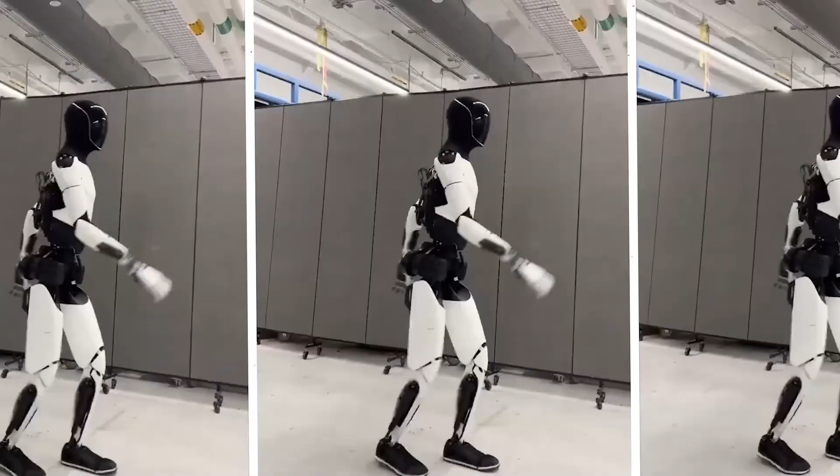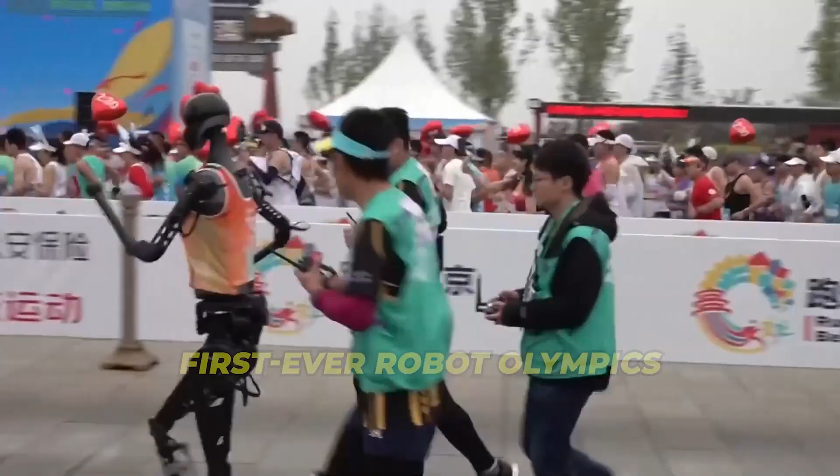But Unitree isn't alone in this race. Lenovo is stepping into the humanoid arena with surprising ambition, and China is preparing to host the first ever Robot Olympics. This isn't just progress, it's a turning point in the evolution of robotics, and it's unfolding right now.

The game-changing brain, AMO. So what we're saying was that Unitree's G1 humanoid robot just received a revolutionary upgrade called AMO, or Adaptive Motion Optimization. This isn't just a software update, it's essentially giving the robot a brain that understands how to move like a living being. What makes AMO special?

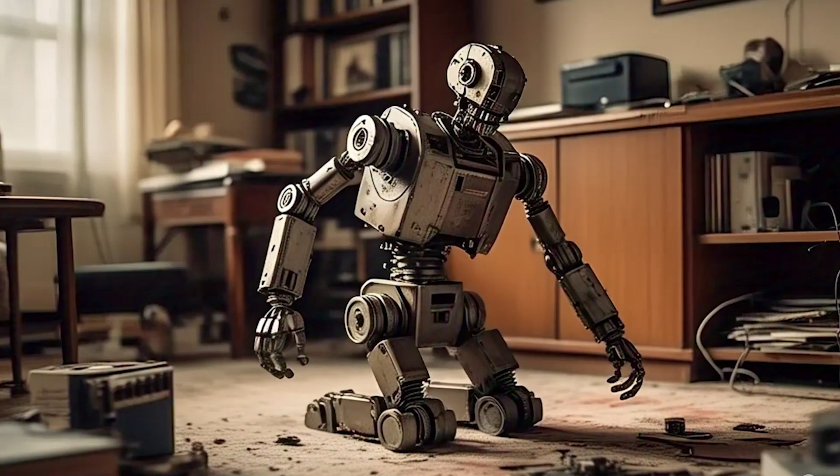Most humanoid robots struggle with complex movements because controlling 29 degrees of freedom while maintaining balance is incredibly difficult. Traditional approaches used rigid control systems or pre-programmed motions that couldn't adapt to real-world environments. AMO changes everything by combining reinforcement learning with trajectory optimization.

The system runs millions of simulations, allowing the robot to fail repeatedly without physical damage. It learns to pick up objects from the floor, reach high shelves, twist its torso, and crouch, all without losing balance. These lessons then translate into real-world behavior that works not just in controlled environments, but in your actual home.

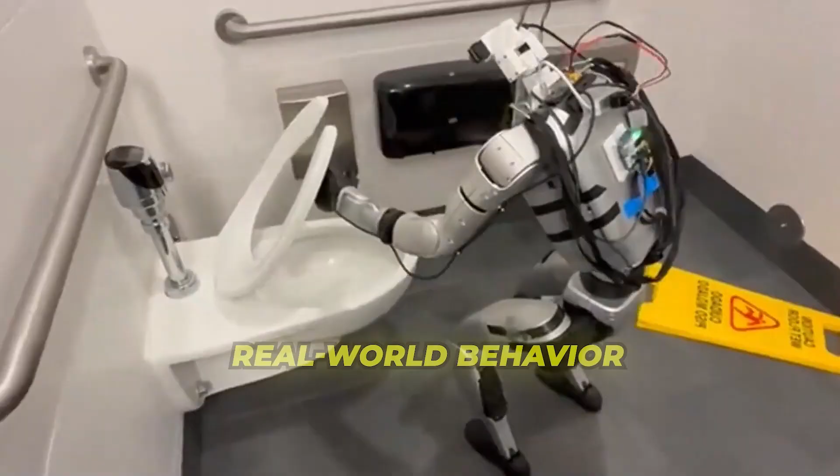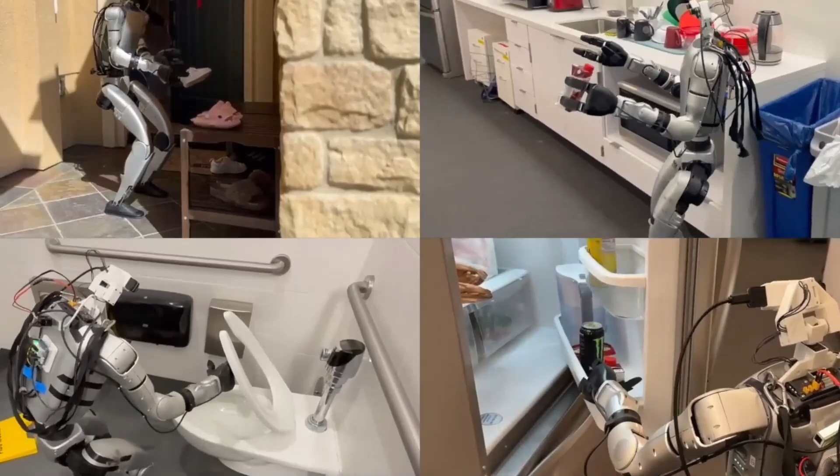When you see the G1 bend down to grab a toy, or carefully adjust its balance to place a bottle on a high shelf, that's AMO in action. It's controlling the robot's entire body, legs, torso, waist, based on an internal plan, not just isolated joint movements. And it does this in real time, responding to environmental changes and adapting to unpredictable inputs.

What's truly remarkable is the teleoperation capability. You can control G1 using a VR headset and it'll mirror your movements. But here's the magic: when you let go, it doesn't freeze. It understands the goal and continues executing the task, smoothly transitioning from human guidance to autonomous action.

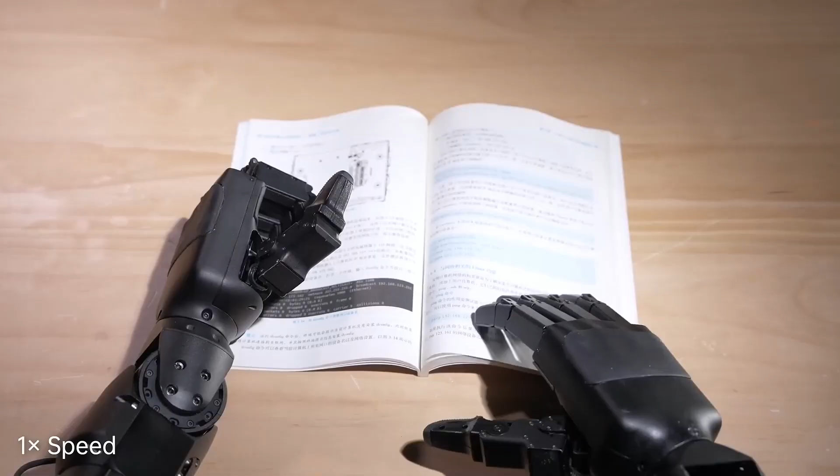Under the hood, AMO uses a hybrid motion synthesis pipeline that blends human-like arm movements from motion capture data with sampled torso commands. This generates entirely new kinds of whole-body actions that weren't even in the original datasets. The robot isn't just imitating, it's generalizing.

For example, G1 doesn't rely solely on waist motors to tilt its upper body. Instead, it shifts its legs, bends its knees, and uses full-body posture to reach angles that previous robots couldn't attempt. There's extensive work behind the scenes to ensure this control works out of distribution, meaning G1 can handle commands and situations it never encountered during training.

In testing, G1 performed tasks like picking up baskets from floor level, walking forward, and placing them on eye-level shelves. This kind of full-body coordination, from crouching to twisting to reaching to placing, used to be science fiction. AMO makes it routine. Now, if you are shocked with this news, make sure to watch how China has already...

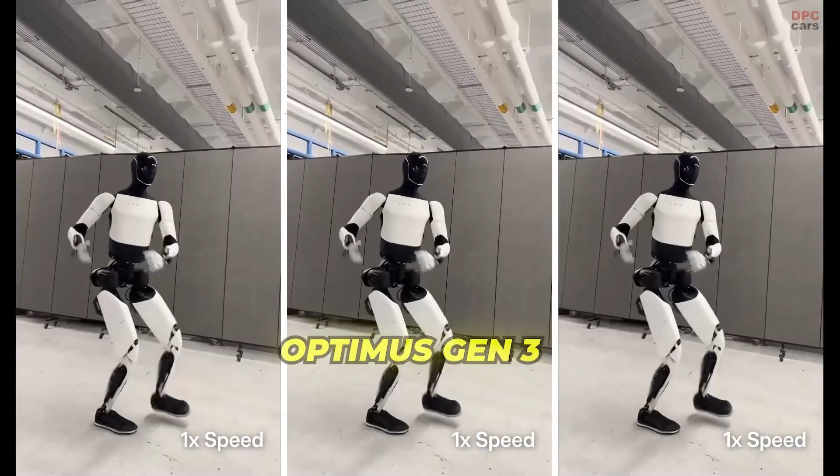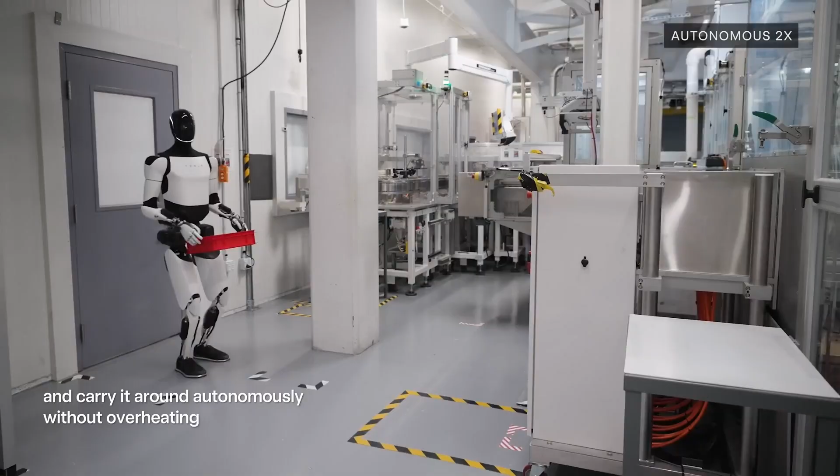But here's the twist: this isn't a minor evolution. This is the world's first truly autonomous humanoid robot. To understand just how revolutionary Tesla Bot Gen 3 truly is, we need to look at what separates it from both its predecessors and every other humanoid robot currently in development.

When the first Optimus prototype debuted in 2022, critics were quick to dismiss it as nothing more than an expensive tech demo. The robot could barely walk in a straight line, and its movements were rigid and pre-programmed. Fast forward to 2025, and we're looking at a completely different machine.

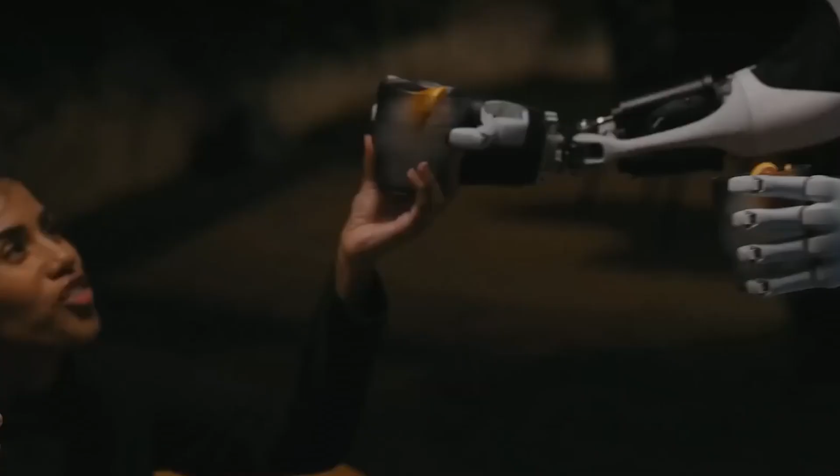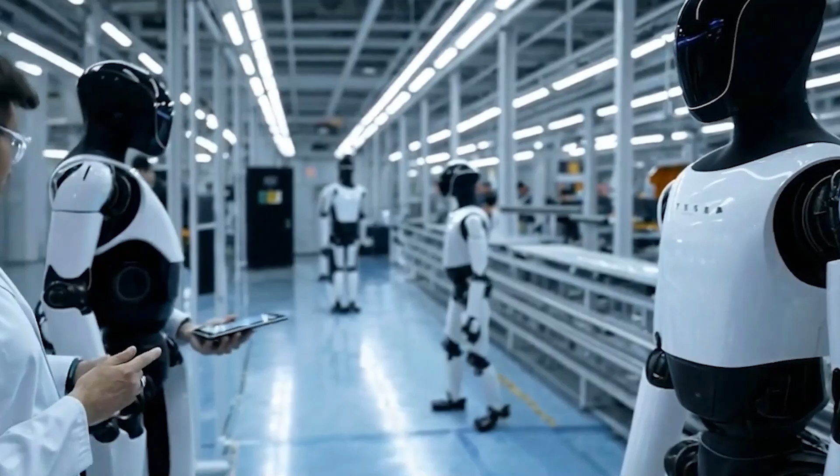The most striking difference lies in Optimus Gen 3's dynamic real-time control system. While previous versions relied heavily on pre-programmed movements and basic servo motors, Gen 3 operates through what Tesla engineers call simulation-first learning. Every movement is refined within Tesla's Dojo supercomputing environment, where reinforcement learning teaches the robot how to shift its center of gravity and adjust joint torque using feedback loops accurate to the microsecond.

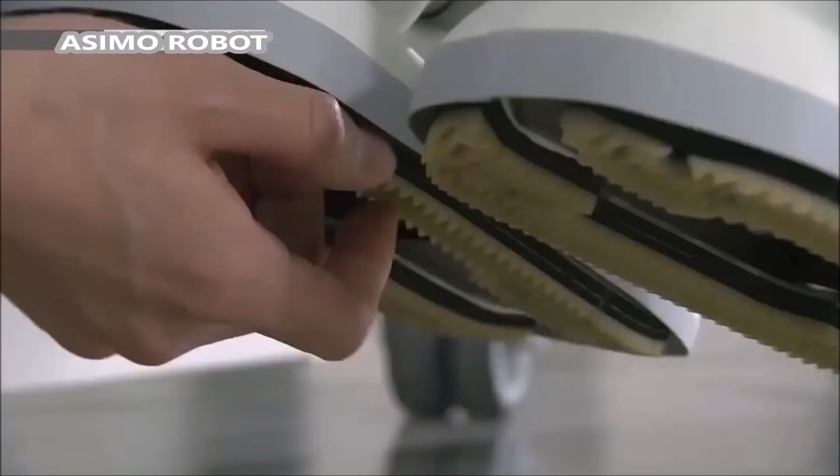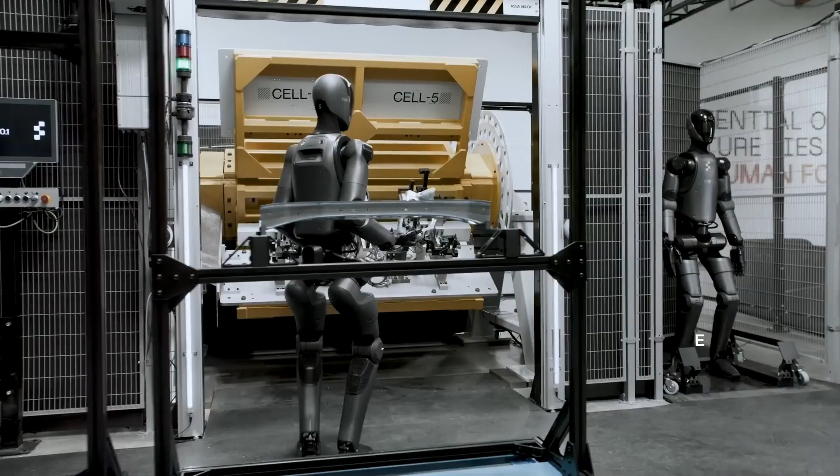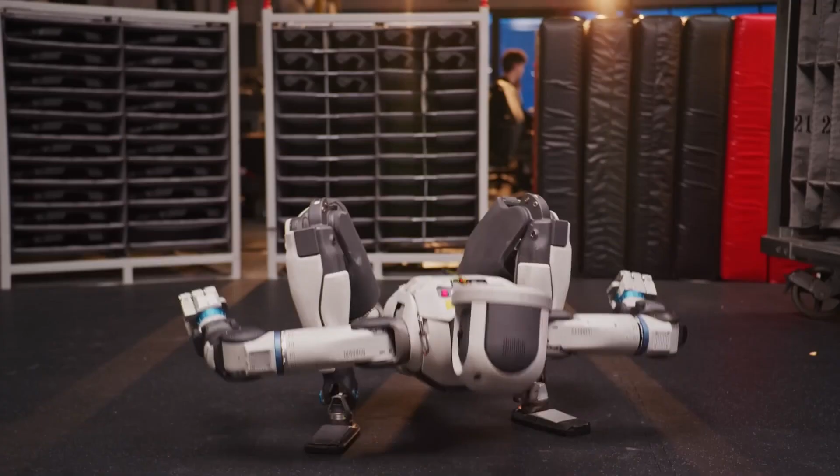Just this week, Boston Dynamics revealed that their latest Atlas humanoid has been equipped with a perception system so advanced that it can work through complete chaos, fix problems on the fly, and even learn from mistakes without any human intervention. We're not talking about pre-programmed movements or carefully choreographed demonstrations anymore. This is a machine that can literally think its way through unexpected situations, and the implications are absolutely mind-blowing.

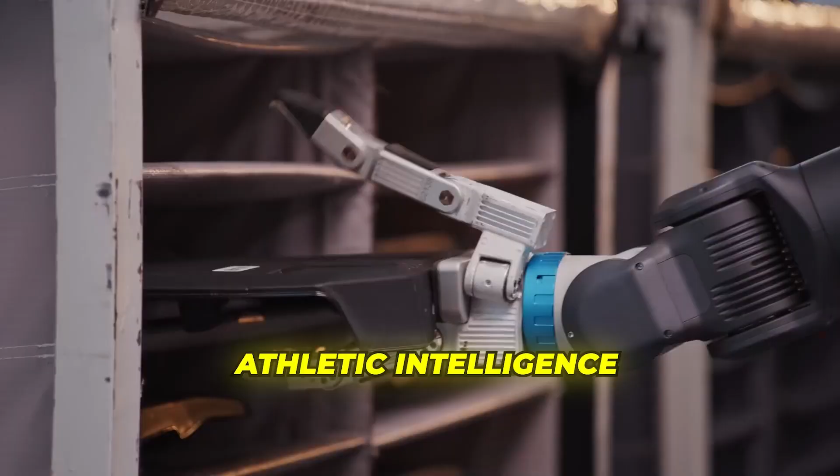But here's what makes this even more incredible. While competitors like Tesla's Optimus are still struggling with basic walking patterns and China's most advanced robots require constant human oversight, Atlas has achieved something that seemed impossible just months ago. It's operating with what engineers are calling athletic intelligence, the ability to perceive, think and act with the fluid adaptability we've only seen in biological systems.

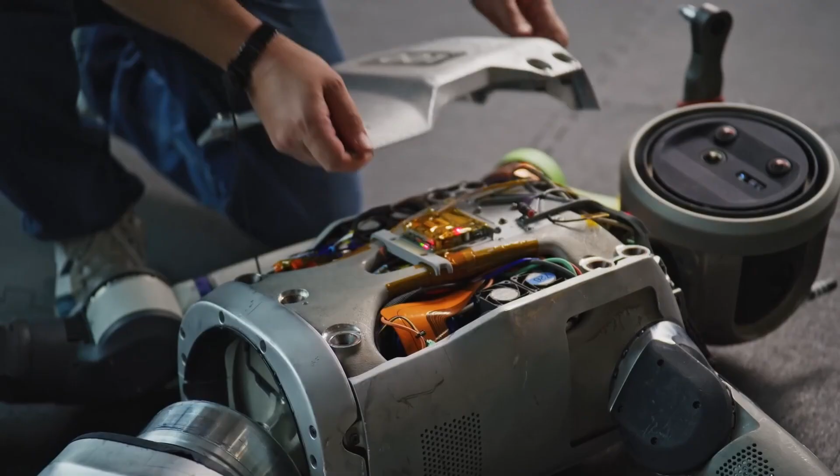So in this video, I'm going to break down exactly what makes this new Atlas so revolutionary, show you the 5 breakthrough technologies that are powering its artificial brain, and explain why this represents the biggest leap in robotics since the invention of the computer. Trust me, by the end of this video, you'll understand why we're witnessing the birth of truly intelligent machines, and why the future just arrived faster than anyone expected.

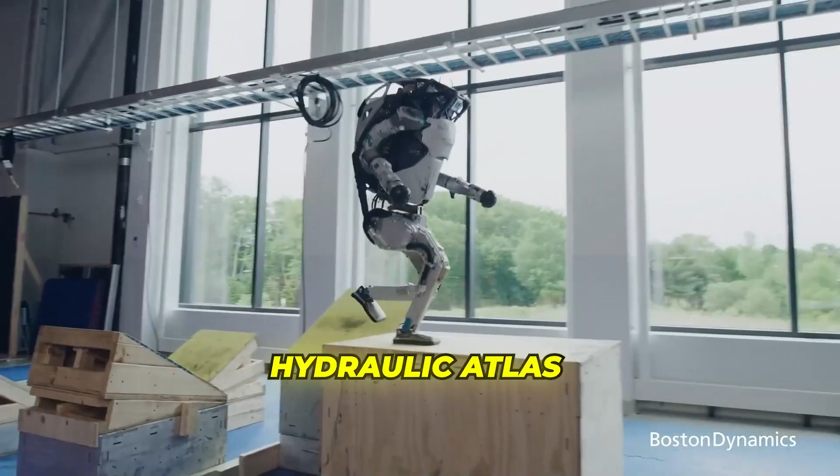To understand just how revolutionary this new Atlas really is, we need to look at the incredible journey that brought us here. The original hydraulic Atlas that captured the world's attention was essentially a mechanical marvel, incredibly strong, surprisingly agile, but ultimately limited by its reliance on pre-programmed movements and hydraulic systems that were loud, messy and energy-hungry.

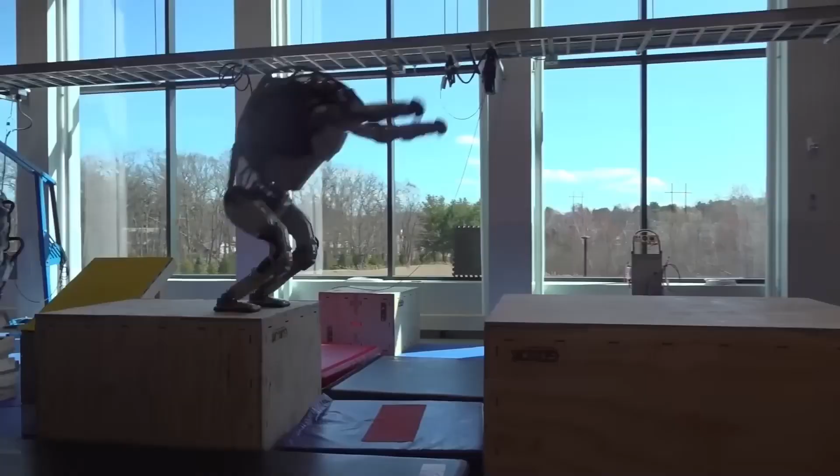That hydraulic Atlas could perform backflips and navigate obstacle courses, but every movement was carefully planned and rehearsed. It was like watching an incredibly talented athlete perform a routine they'd practiced thousands of times. Impressive? Absolutely. But truly intelligent?

Not quite. The new all-electric Atlas represents a complete philosophical shift in robotics design. Instead of building a machine that executes pre-planned movements, Boston Dynamics has created a robot that can perceive its environment, understand what it's seeing, make decisions about how to respond, and then execute those decisions with precision that rivals human capability. This isn't just an upgrade, it's a fundamental reimagining of what a robot can be.

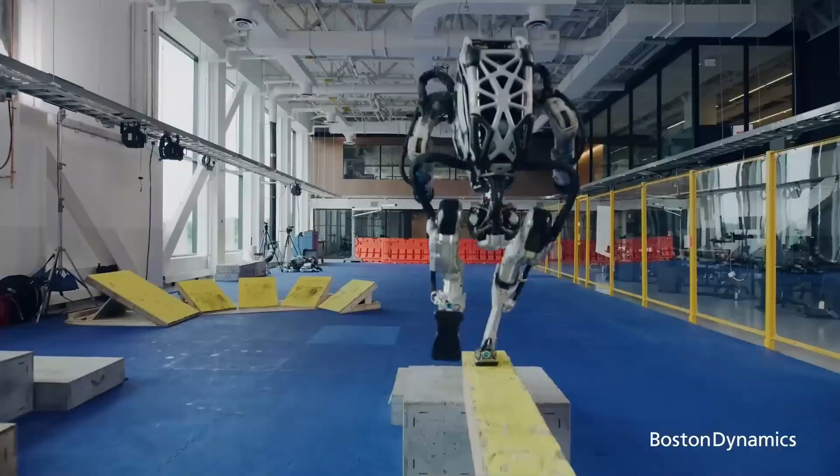The new Atlas weighs 89 kilograms, stands with perfect posture, and moves with a fluidity that makes its predecessor look robotic by comparison. But the real magic isn't in its physical design. It's in the artificial brain that's processing information and making decisions faster than human thought.

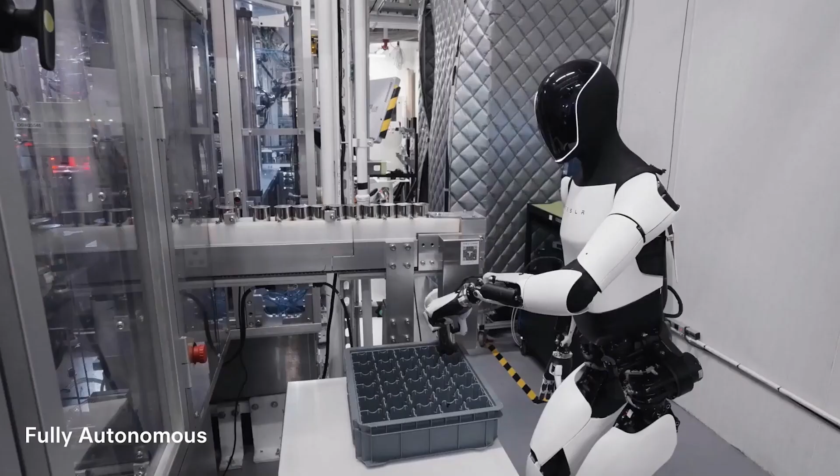What makes this even more impressive is that Tesla engineers confirmed the robot was operating in what they call blindfolded mode during portions of the demonstration. This means Optimus wasn't relying on its visual cameras to maintain balance and execute movements. Instead, it was using proprioceptive sensors throughout its body, much like how humans can maintain balance with their eyes closed by relying on inner ear feedback and muscle memory.

Milan Kovac, a Tesla engineer working directly on the Optimus project, revealed that these movements were entirely learned in simulation and transferred to the real world with zero additional training. This sim-to-real pipeline represents a breakthrough in robotics that could revolutionize how we develop and deploy autonomous systems across countless industries.

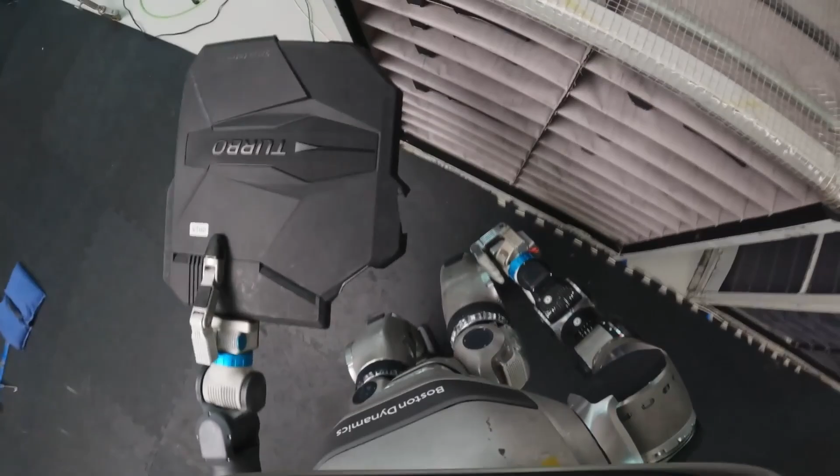These aren't just incremental improvements, they're revolutionary capabilities that transform how robots interact with the world.

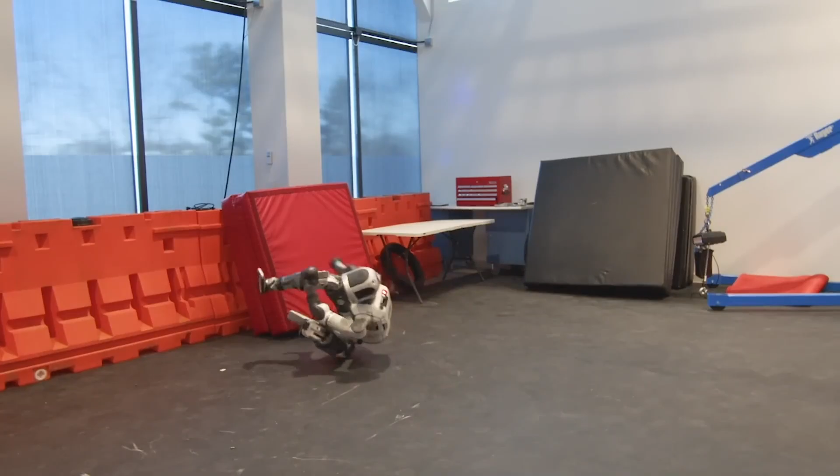The first breakthrough is real-time object detection that goes far beyond simple recognition. Atlas can identify objects, obstacles and hazards in its environment while simultaneously understanding their properties, dimensions and potential interactions. When Atlas looks at a factory floor, it doesn't just see shapes and colors, it understands that this object is a shelf, that component is a car part, and this area represents a potential hazard. But here's where it gets really impressive: Atlas can do all of this processing in real time while maintaining perfect balance and executing complex movements. The robot's vision system operates through lightweight neural networks that deliver instant recognition without sacrificing accuracy or speed.

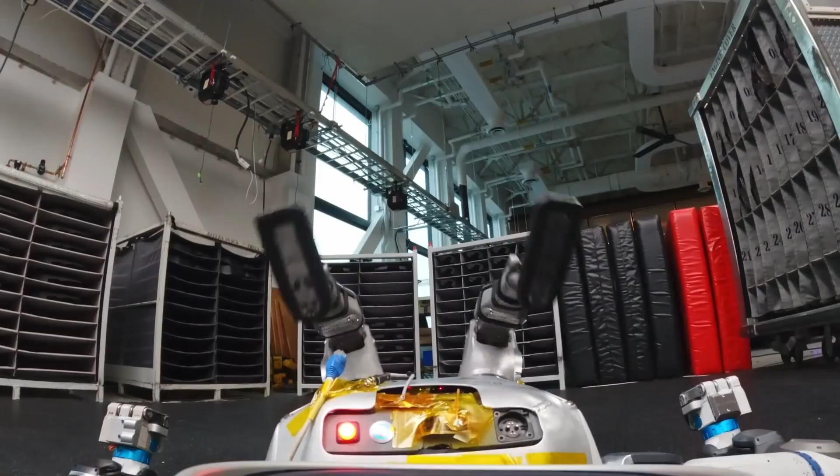The second revolutionary capability is three-dimensional fixture localization. Atlas doesn't just see objects, it understands exactly where it is in relation to everything around it with millimeter precision. When working with automotive parts that require exact placement, Atlas can maintain positioning accuracy within a 5 centimeter margin, even when the entire work environment is shifting around it. During recent demonstrations, engineers deliberately moved shelving units while Atlas was working. Instead of failing or requiring reprogramming, the robot paused for a fraction of a second, recalculated its position relative to the new environment, and continued working as if nothing had happened. This kind of spatial awareness and adaptability was impossible just a year ago.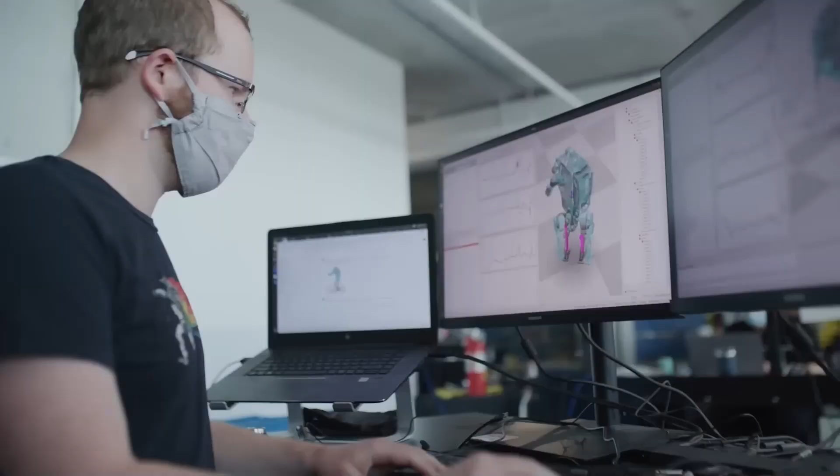The third breakthrough technology is what Boston Dynamics calls super tracker object pose estimation. This system allows Atlas to understand not just what objects are, but exactly how they're oriented in three-dimensional space. When Atlas picks up a complex automotive component, it instantly understands the object's weight distribution, optimal grip points, and how to manipulate it for precise placement. This capability extends to handling objects that Atlas has never encountered before. The system can analyze new objects in real time, determine their properties, and figure out the best way to manipulate them without any prior training or programming.

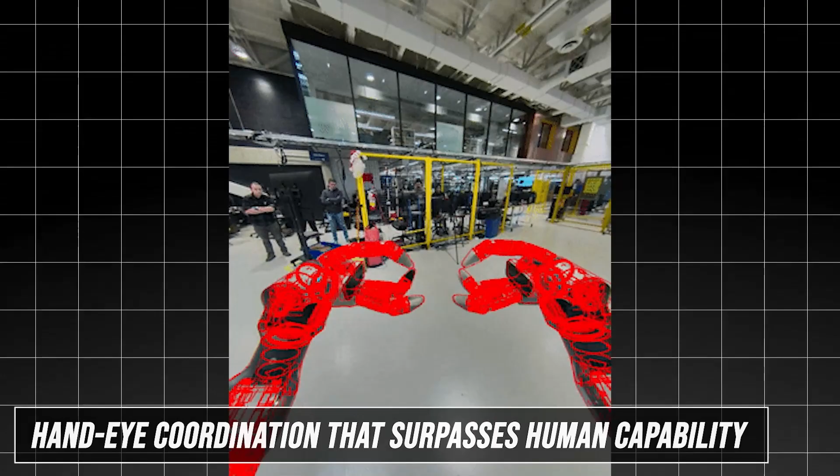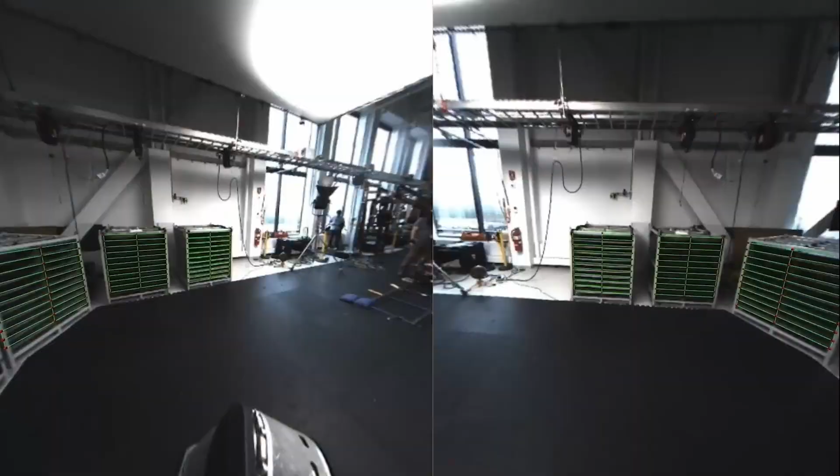The fourth revolutionary technology is hand-eye coordination that operates with superhuman precision. Atlas can coordinate its visual perception with its physical movements to achieve accuracy that exceeds human capability in many tasks. When placing automotive parts into precise slots, Atlas maintains positioning accuracy within 2 millimeters, a level of precision that would challenge even skilled human technicians. This isn't just about steady hands or good eyesight. Atlas is processing visual information, calculating optimal movement paths, and executing precise manipulations while constantly adjusting for variables like lighting changes, surface irregularities, and unexpected obstacles.

The fifth and perhaps most impressive breakthrough is adaptive error correction. Atlas doesn't just detect when something goes wrong, it learns from mistakes and adjusts its behavior to prevent similar problems in the future. When an object doesn't fit properly, or a movement doesn't achieve the desired result, Atlas analyzes what went wrong, develops alternative approaches, and implements solutions in real time.

During one demonstration, an engineer deliberately dropped a heavy automotive part behind Atlas while the robot was working. Atlas heard the sound, turned to investigate, located the fallen part, analyzed its orientation, figured out the optimal way to pick it up, and placed it correctly, all without any human instruction or intervention.

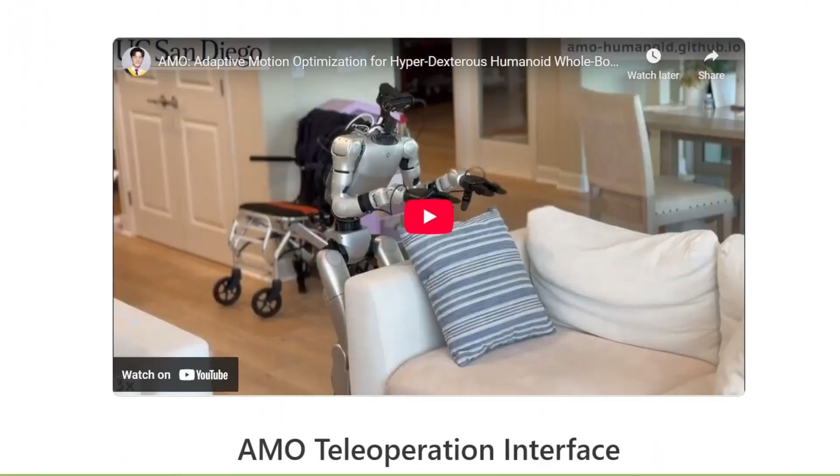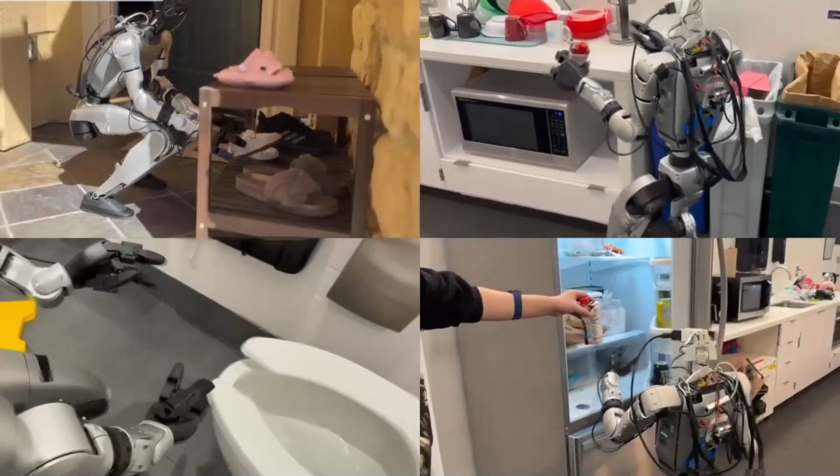How does AMO compare to other systems? Detailed evaluations comparing AMO to older control strategies showed it outperformed everything else across the board. Even when pushed into untrained territory, AMO showed minimal tracking error. In trash-throwing tasks, it smoothly twisted its torso 90 degrees and nailed the throw. In another setup, it picked up a paper bag by aligning its torso, maneuvering its hand through the loop, then lifting and placing it without losing grip or posture.

The training process is equally impressive. AMO uses a two-stage learning framework: a teacher policy with access to ideal data, followed by a student policy learning in a more restricted setup, mimicking what the robot would experience in the real world. This approach allows the final system to perform reliably without perfect conditions.

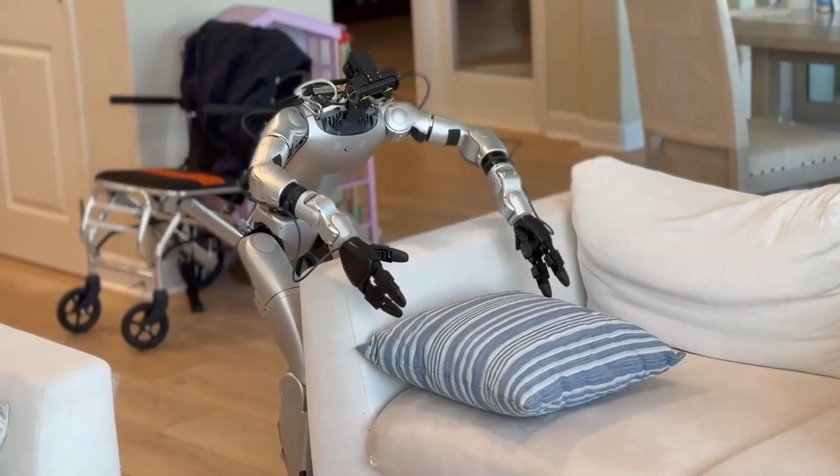The result? G1 with AMO isn't just reacting, it's planning, adjusting, and executing complex tasks that most robots still struggle with. It stretches, crouches, twists, walks, and balances while coordinating all 29 joints across its body. Instead of the mechanical stiffness we usually see in robots, G1's movements feel smooth, deliberate, and surprisingly human. This is where humanoid robotics is heading: not just mobility, but full-body dexterity with responsiveness that makes real-world deployment finally possible.

Unitree didn't stop with humanoids. They've also transformed their B2 quadruped robot into a specialized firefighting machine. This modified version comes equipped with a water or foam cannon capable of shooting up to 60 meters away at 40 liters per second, powerful enough for serious emergency response.

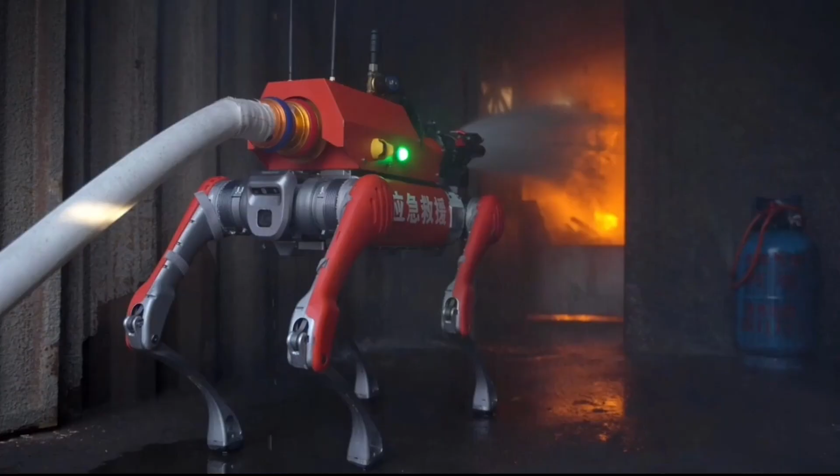The firefighting B2's joints are upgraded by 170% over the standard model, allowing it to climb obstacles up to 15 inches high and handle steep stairs at a 45-degree angle, perfect for navigating damaged buildings and chaotic disaster scenes.

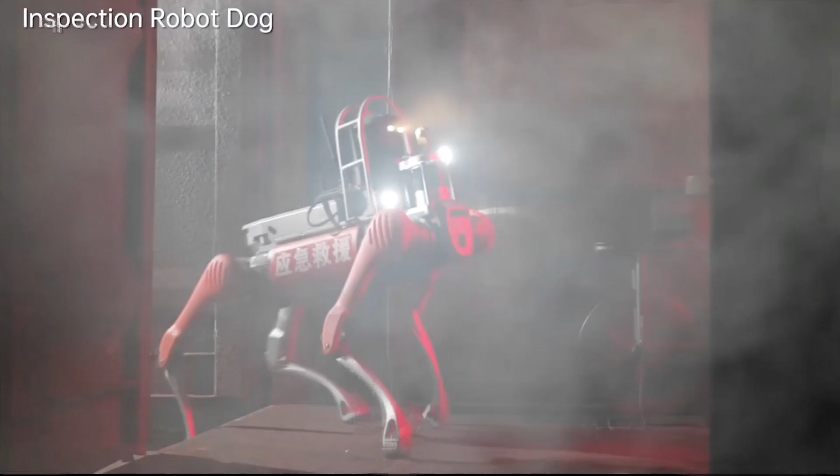But it's not just about raw power. The B2 firefighting dog is packed with technology: live video feeds, LiDAR sensors, and communication equipment for sending real-time updates to human teams. It features a built-in cooling sprinkler system to survive extreme heat, plus swappable batteries that maintain waterproof integrity. This machine is designed to go where humans can't: collapsed buildings, toxic environments, zero visibility areas. It can map surroundings, locate fires, carry specialized modules, and support rescue operations without putting human lives at risk.

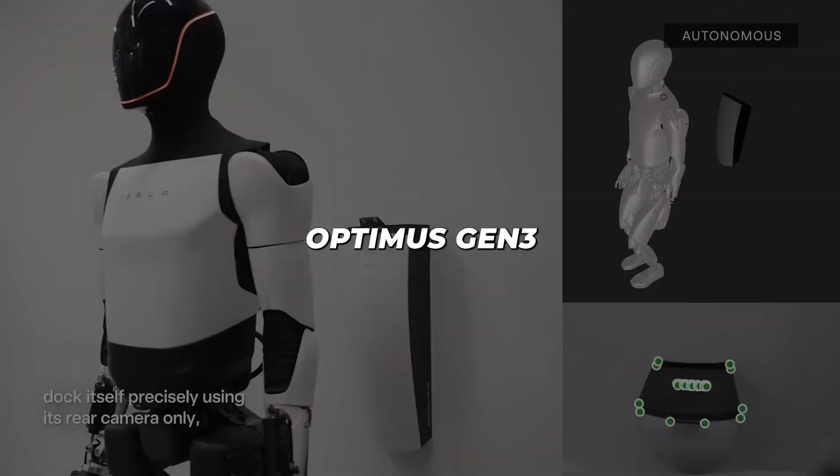Beyond the impressive demonstrations, Optimus Gen 3 has been quietly mastering the mundane tasks that actually matter in daily life. Recent footage shows the robot performing household chores with remarkable dexterity, picking up trash bags, opening cabinet doors, cleaning tables, tearing paper towels from rolls, stirring pots, and even operating a vacuum cleaner.

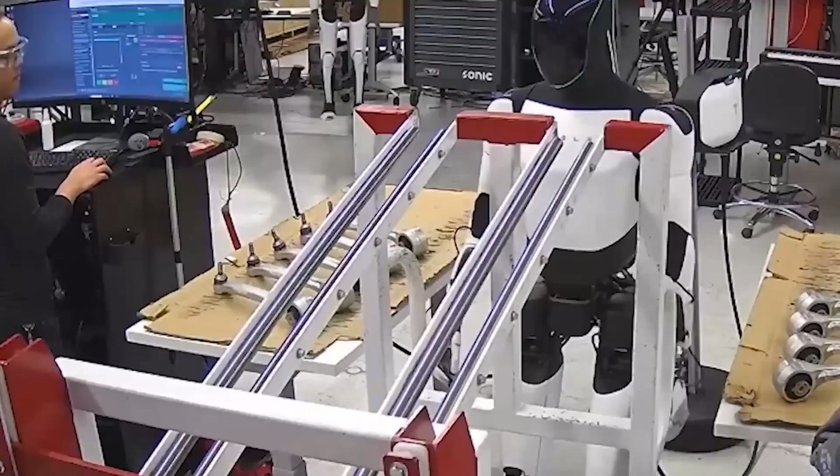These might seem like simple tasks, but they represent enormous technical challenges. Each action requires the robot to understand object properties, apply appropriate force, and adapt to unexpected variables. When Optimus tears a paper towel, it must gauge the exact amount of pressure needed to separate the sheet without tearing the entire roll. When stirring a pot, it needs to understand viscosity, temperature, and the appropriate stirring pattern for different types of food. The robot's hands deserve special attention.

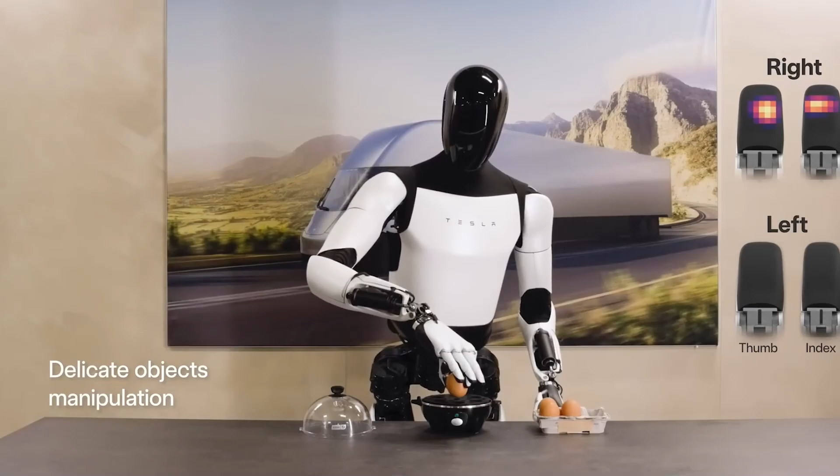Optimus Gen 3 features 22 degrees of freedom in its hand design, allowing for incredibly precise manipulation of objects. It can handle delicate items like eggs without breaking them, yet apply enough force to lift heavy objects weighing up to 20 kilograms in each arm. This versatility comes from advanced tactile sensors that provide real-time feedback about pressure, texture, and object stability.

Perhaps most importantly, Optimus Gen 3 can navigate uneven terrain autonomously. In demonstrations, the robot successfully traverses grass, gravel, and stairs without any remote human control. It uses sensors in its feet to analyze ground conditions and adjusts its gait accordingly, much like how humans automatically modify their walking pattern when moving from pavement to sand.

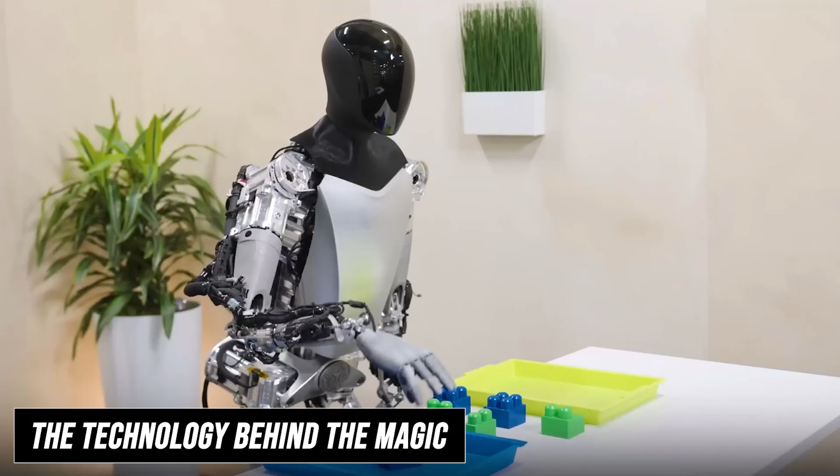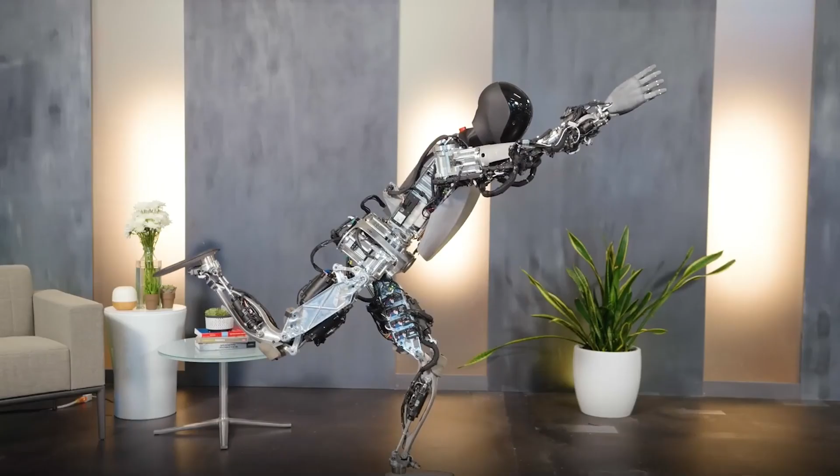At the heart of Optimus Gen 3's capabilities lies Tesla's integration of automotive AI technology with advanced robotics. The robot uses the same neural network architecture that powers Tesla's full self-driving system, adapted for bipedal locomotion and manipulation tasks. This gives Optimus a significant advantage over competitors who are building their AI systems from scratch. The robot's brain consists of a custom AI chip containing trained neural networks that process sensory input and make real-time decisions. Optimus is equipped with multiple cameras, ultrasonic sensors, and proprioceptive feedback systems that create a comprehensive understanding of its environment. This sensor fusion allows the robot to build detailed maps of its surroundings and remember environments for future interactions.

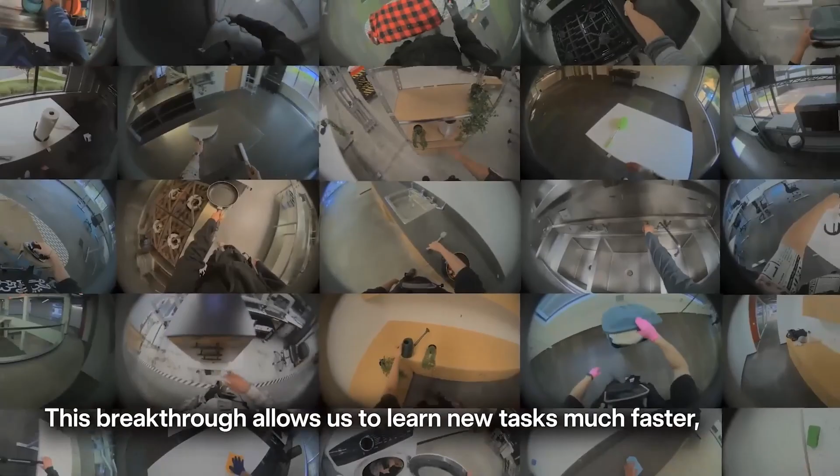Power management represents another crucial advancement. Optimus Gen 3 operates on a 2.3 kilowatt-hour battery pack that provides up to 10 hours of continuous operation. The robot's power consumption has been optimized to just 1.6 kilowatt-hours under normal operating conditions, making it incredibly energy efficient. At current electricity rates, operating Optimus costs less than 30 cents per day.

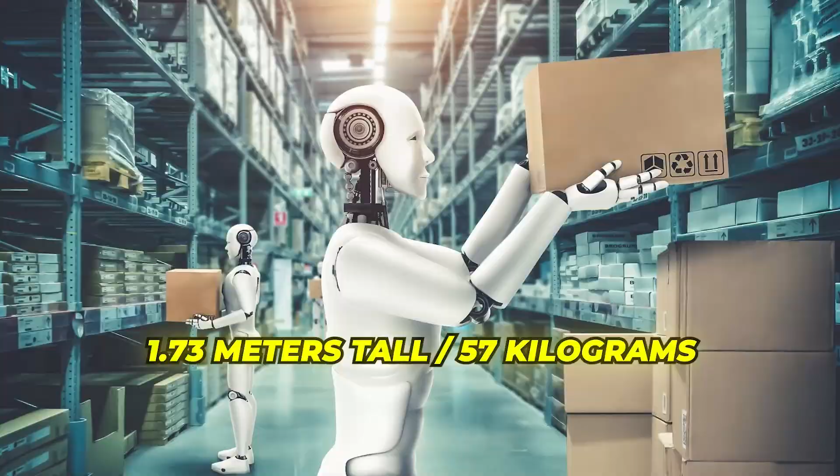The physical design emphasizes both durability and human-like proportions. Standing 1.73 meters tall and weighing approximately 57 kilograms, Optimus Gen 3 can fit through standard doorways and navigate spaces designed for humans. The robot's outer shell combines lightweight plastics with strategic metal reinforcements, creating a design that's both robust and efficient. What makes these capabilities truly revolutionary isn't their technical sophistication, it's how they translate into real-world performance that surpasses human workers in many scenarios.

Atlas is already working in Hyundai's Georgia factory, where it's handling tasks that are too dangerous, too precise, or too physically demanding for human workers. The robot can lift objects weighing up to 20 kilograms in each hand while maintaining perfect precision. It can work continuously for hours without fatigue, breaks, or loss of accuracy. Most importantly, Atlas can adapt to changing conditions, unexpected problems, and new challenges without requiring reprogramming or human intervention. In recent factory trials, Atlas completed assigned tasks 18% faster than previous benchmarks, while maintaining higher accuracy rates than human workers.

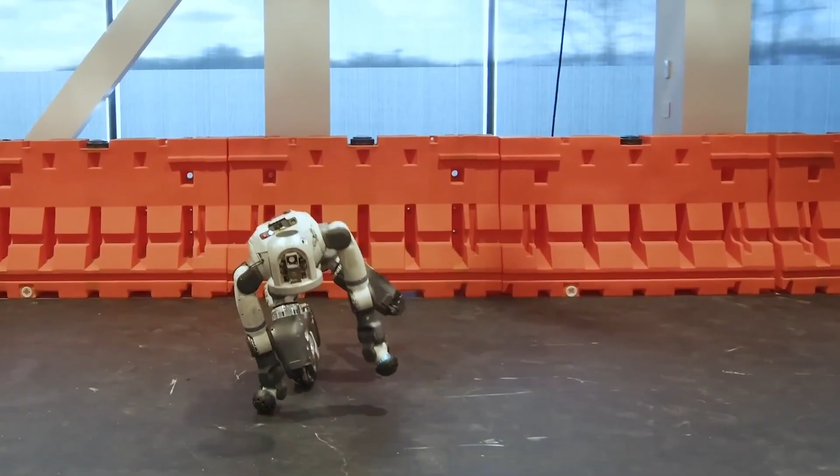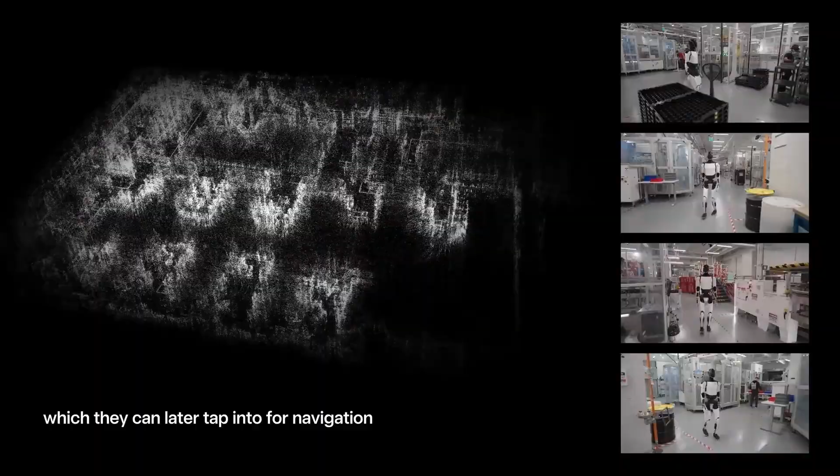When unexpected problems arose—parts that didn't fit properly, equipment that malfunctioned, or work areas that changed configuration—Atlas solved these problems autonomously and continued working. While Atlas is achieving these breakthrough capabilities, the competition is struggling to match even basic functionality. Tesla's Optimus, despite years of development and massive investment, still requires safety harnesses for many demonstrations and operates primarily through remote human control. China's most advanced humanoid robots, while impressive in their own right, lack the integrated intelligence that allows Atlas to work autonomously in unpredictable environments. Most competing robots excel at specific, pre-programmed tasks, but fail when confronted with unexpected situations or novel problems.

What sets Atlas apart isn't just superior hardware, it's the integration of artificial intelligence that approaches genuine understanding. While other robots execute programmed routines, Atlas perceives, analyzes, decides and acts with a level of autonomy that represents a fundamental breakthrough in robotics. The secret to Atlas's revolutionary capabilities lies in its integration with NVIDIA's most advanced AI computing platforms.

The robot runs on NVIDIA's Jetson Thor computing system, which delivers 800 teraflops of AI performance through next-generation Blackwell architecture processors. This computational power allows Atlas to process multiple data streams simultaneously: visual information from cameras, spatial data from sensors, proprioceptive feedback from joints and actuators, and environmental data from microphones and other sensors.

All of this information is integrated through transformer-based foundation models that enable real-time decision-making and adaptive behavior. The robot's control systems operate through time-varying quadratic programs that solve 68 state variables at 1000 Hz, while direct drive motors close torque loops at 2000 Hz. This means Atlas is making thousands of micro-adjustments every second to maintain balance, execute movements, and respond to environmental changes.

What truly sets Tesla apart in the robotics space isn't just technological capability, but manufacturing expertise. Tesla has already begun production of Optimus units at its Fremont factory, with over 1,000 robots assembled in the first quarter of 2025 alone. This isn't prototype production, these are the same machines planned for commercial sale.

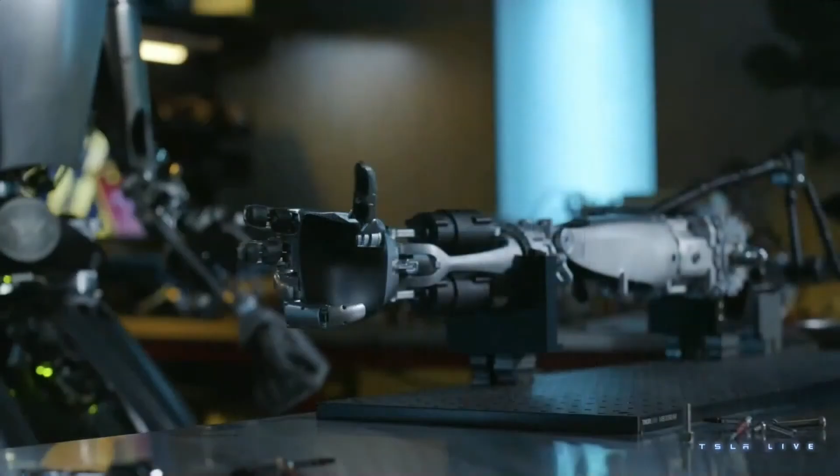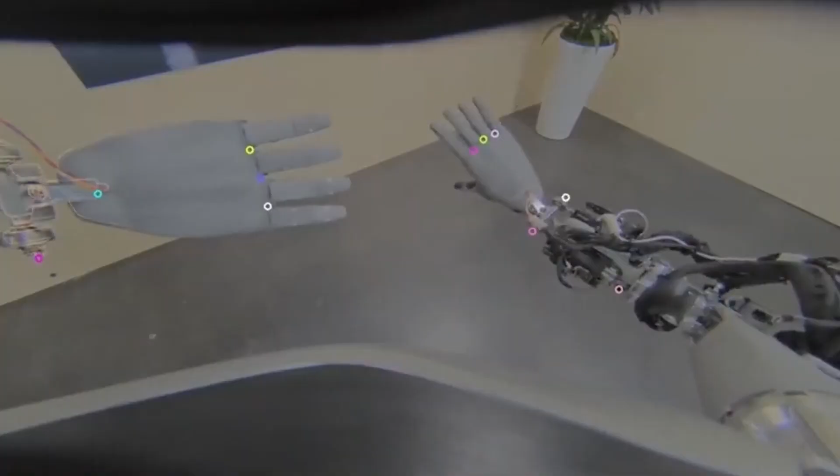Elon Musk's pricing projections have consistently targeted the $20,000 to $25,000 range, with potential for costs as low as $10,000 once production reaches full scale. To put this in perspective, current humanoid robots from competitors typically cost hundreds of thousands of dollars and are primarily sold to research institutions and large corporations.

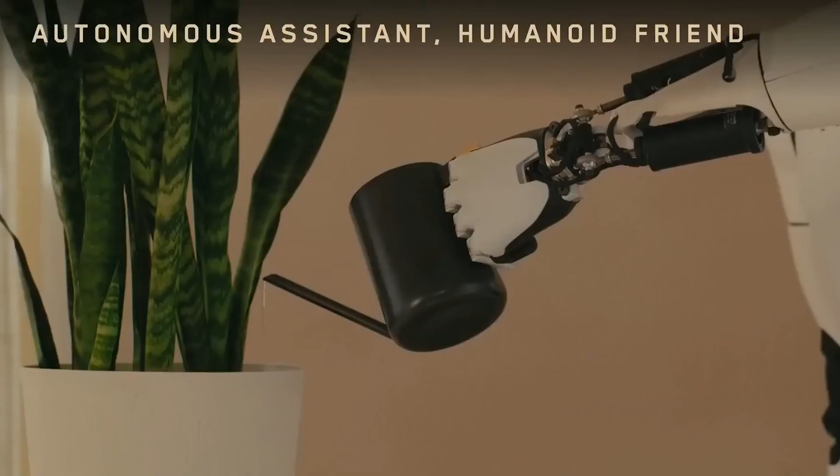Tesla's approach leverages the same manufacturing techniques that made the Model 3 a global bestseller. The company is developing assembly lines capable of producing 1,000 robots per month initially, with plans to scale to 10,000 and eventually 100,000 units monthly at next-generation facilities. This industrial capacity transforms Optimus from a research curiosity into a scalable consumer product.

The economic implications are staggering. Musk has suggested that the total addressable market for humanoid robots could be 10 times larger than the automotive industry. With global labor shortages affecting everything from healthcare to manufacturing, autonomous robots capable of performing human-level tasks could revolutionize entire economic sectors.

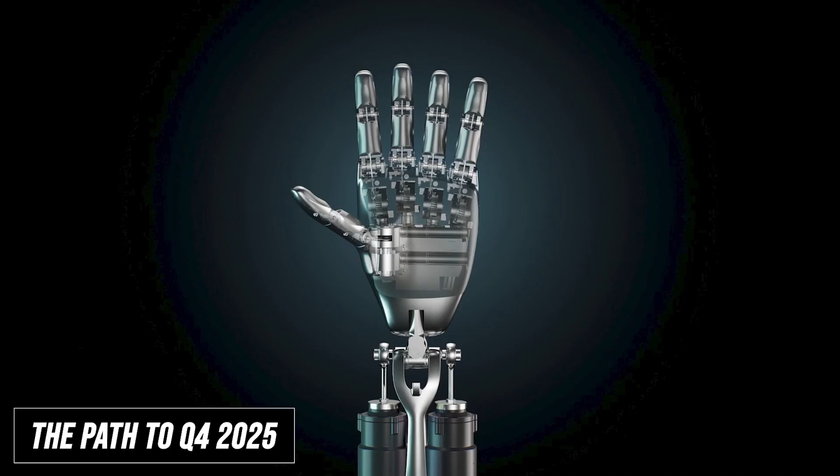Tesla's confirmed Q4 2025 sale date isn't just an ambitious target, it's backed by concrete production milestones and regulatory preparations. The company has been conducting extensive real-world testing across more than 1,000 practical tasks, gathering data that feeds back into the robot's learning algorithms.

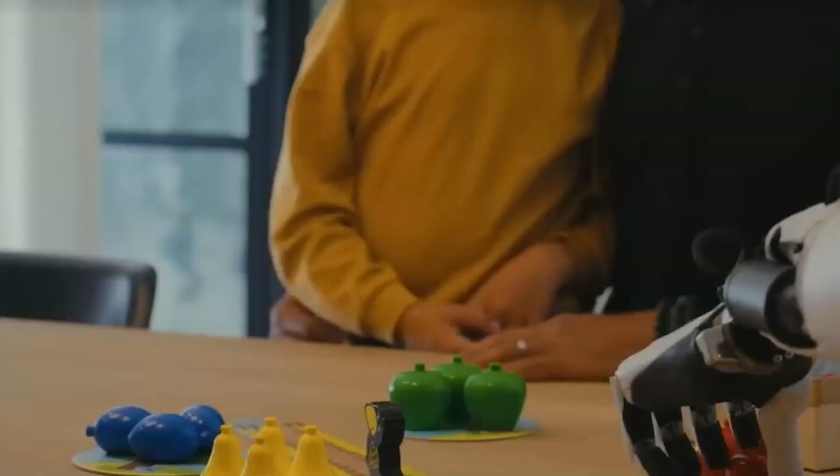Safety certifications represent a crucial hurdle that Tesla is actively addressing. Optimus Gen 3 includes multiple redundant safety systems, including dual battery backup, torque sensors that detect anomalies before they become problems, and fail-safe protocols that ensure the robot enters a controlled shutdown if any system malfunctions.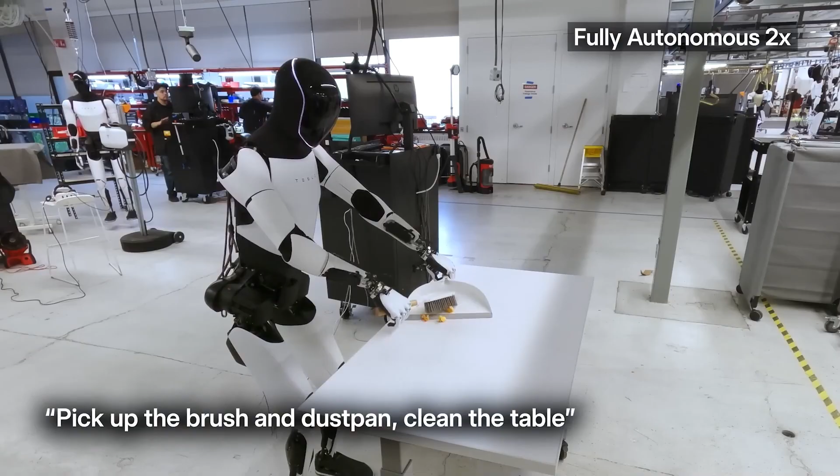The initial market strategy focuses on commercial and industrial applications before expanding to consumer markets. Tesla plans to deploy Optimus robots in its own manufacturing facilities first, using them to validate performance and gather operational data. This approach mirrors the company's strategy with full self-driving technology, where internal testing precedes broader market release.

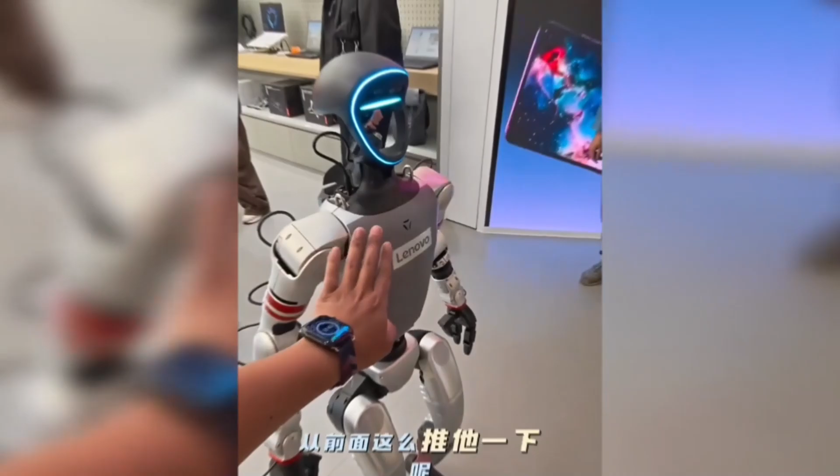Now, let's switch gears to a surprising new competitor. Lenovo, known primarily for computers and mobile devices, just entered the humanoid robot race with their first model, Lexiang No. 1.

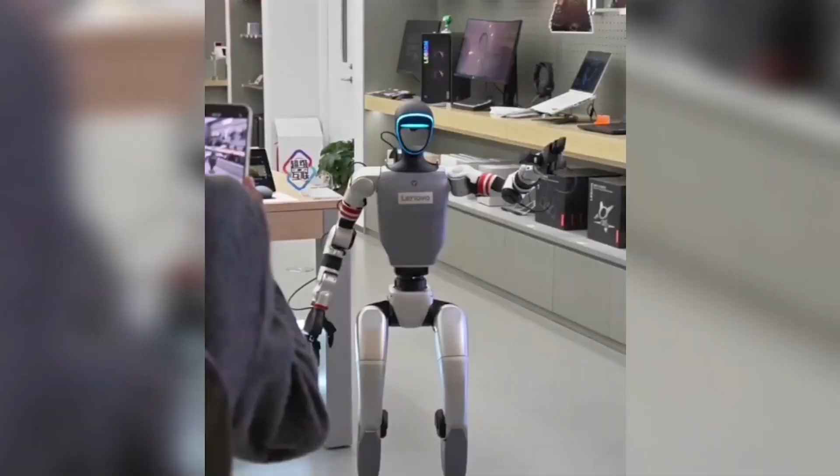At their Tech World 2025 event in Shanghai, Lenovo unveiled this robot with a dramatic demonstration performing a complete Tai Chi routine on stage. This wasn't just walking or standing, but slow, balanced martial arts movements executed live.

During the Q&A session, the robot pulled data from Lenovo systems in real time and answered questions like a trained representative. Lenovo isn't just showing off technology, they're planning real-world applications. The company intends to deploy these robots in elder care and healthcare environments soon.

And in August, they're bringing Lexiang No. 1 to compete in the Beijing Humanoid Robot Sports Games.

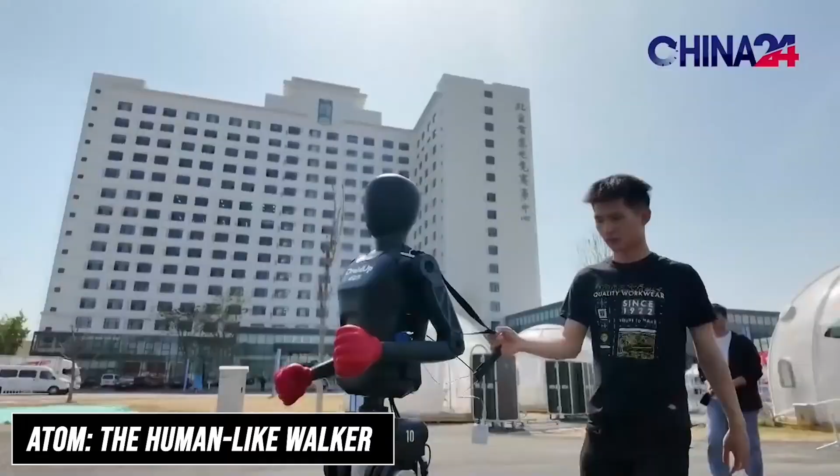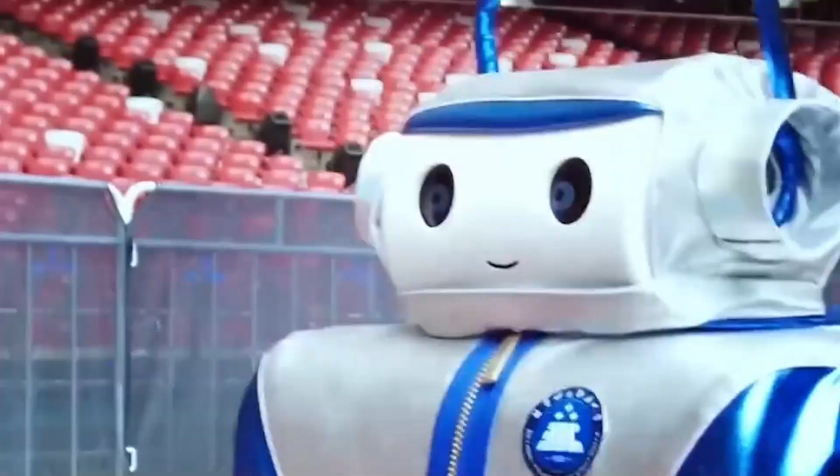Speaking of which, yes, the Robot Olympics is actually happening. Beijing is hosting the first humanoid robot sports games this August at two Olympic venues, the Bird's Nest and the Ice Ribbon. This isn't just a publicity stunt. The event will feature 11 human sports recreated for humanoid robots: track and field, football, gymnastics, and more. Robotics experts and sports professionals have collaborated to create events that mimic human movement as closely as possible.

The goal is clear: refine mechanical structure and push motion algorithms further through performance under pressure. This is actually the second major robot sports event in China this year. The first was a humanoid half marathon in April, where 20 robots competed in a 21-kilometer race. One robot, named Tiangong Ultra, finished first after nearly 2 hours and 40 minutes. These events aren't just entertainment, they're massive benchmarks for stability, safety, and real-world readiness in complex environments. They serve as testing grounds for robots from different companies, validating their ability to operate outside controlled laboratory settings.

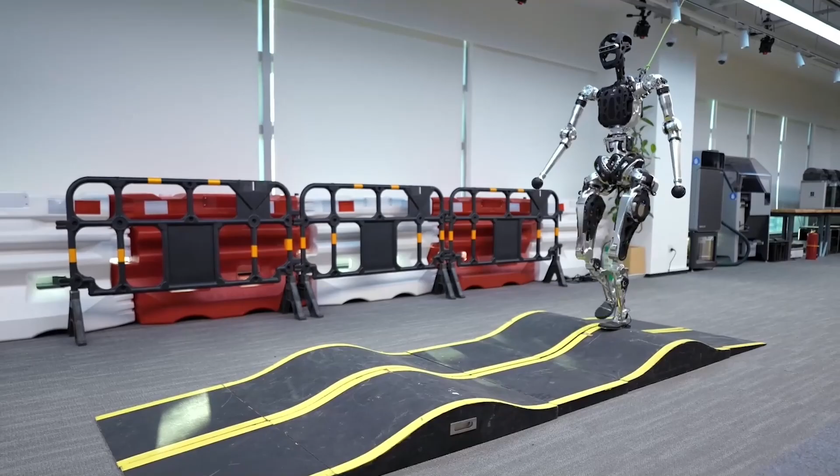Another robot making waves is called Atom, developed by PND Robotics in China. What sets Atom apart is its walking ability. It doesn't just move, it walks like a human, adapting its stride, balance, and pace on uneven terrain. This capability comes from its proprietary reinforcement learning system combined with imitation learning.

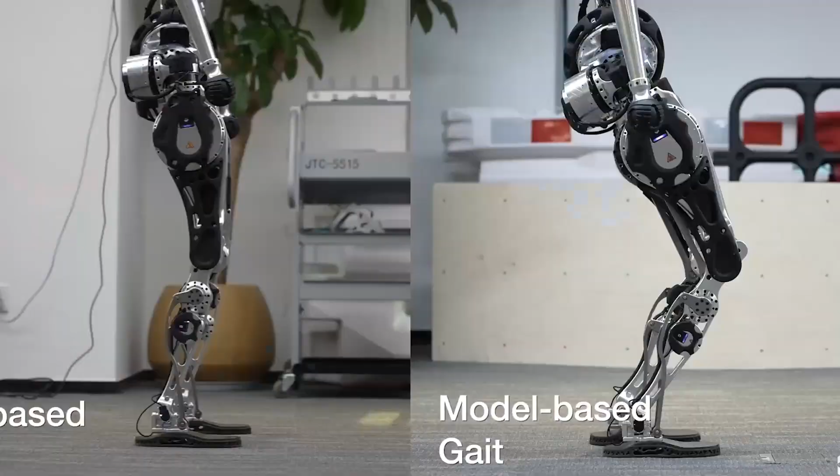In development since mid-2023, Atom has seen upgrades to nearly every component. Its legs and feet are reinforced for durability, and the actuators are modular for handling unpredictable environments. Atom runs on a full-stack system powered by an Intel i7 chip with real-time controls and full body motion architecture. It features 25 force-controlled QDD actuators, with legs delivering up to 360 Newton-meters of torque.

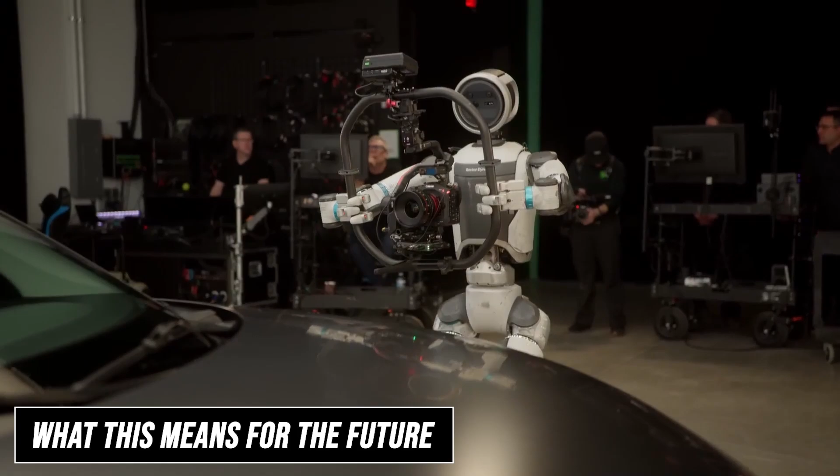The breakthrough capabilities demonstrated by Atlas represent more than just impressive technology. They signal the arrival of truly intelligent machines that can work alongside humans as capable partners rather than simple tools. Within the next few years, we can expect to see Atlas-level capabilities deployed across manufacturing, healthcare, construction, and countless other industries. The robot revolution isn't coming in some distant future, it's happening right now, and Atlas is leading the charge into a world where intelligent machines work alongside humans to solve problems, create value, and push the boundaries of what's possible. The age of truly intelligent robots has arrived, and everything is about to change.

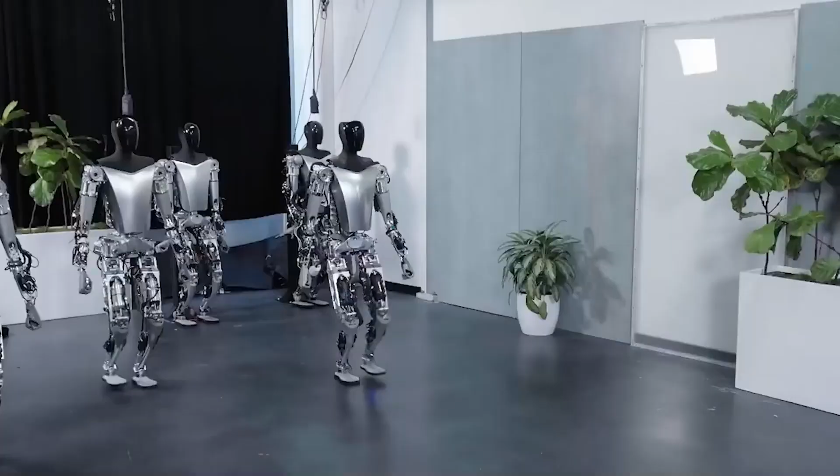While the technological achievements are undeniably impressive, it's important to maintain realistic expectations about what Optimus Gen 3 can and cannot do. The robot excels at structured, repetitive tasks, but still struggles with complex problem-solving that requires human intuition and creativity. As we stand on the brink of Q4 2025, we're witnessing the beginning of a new era.

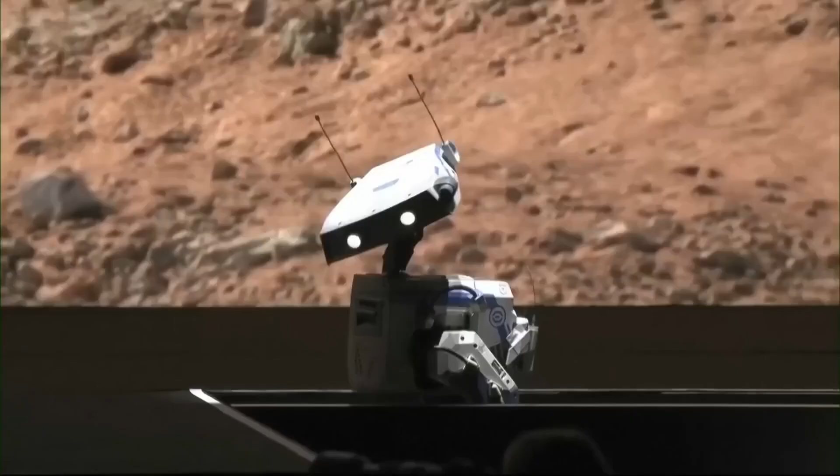The robot revolution isn't coming, it's here. And Tesla's Optimus Gen 3 is leading the charge into a future where the line between human and machine capability continues to blur in ways we're only beginning to understand. The question isn't whether humanoid robots will become part of our daily lives, but how quickly we'll adapt to a world where our mechanical companions are as capable, reliable, and ubiquitous as the smartphones in our pockets today.

Looking at all these developments, the direction is clear. We're moving beyond the demonstration phase. These robots aren't just futuristic concepts or experimental prototypes. They're becoming useful tools ready for real-world deployment. The integration of advanced AI with robotics is creating machines that can adapt to our world rather than requiring us to adapt environments for them.

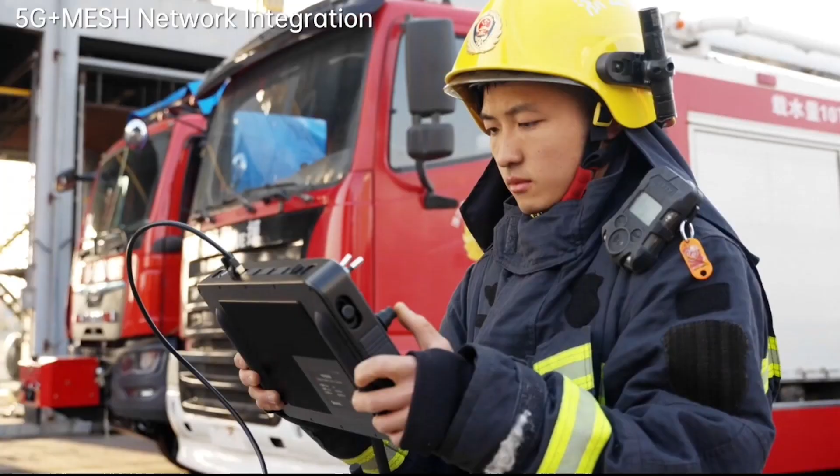From Unitree's AMO brain to Lenovo's enterprise-focused humanoid to specialized rescue robots, we're seeing practical applications emerge across industries. This isn't just about impressive technology, it's about solving real problems. Firefighting robots can enter dangerous situations without risking human lives. Humanoid assistants could help address labor shortages in healthcare and elder care.

And the continuous improvement driven by competitions like the Robot Olympics pushes the entire field forward. We're witnessing the birth of robots that don't just execute pre-programmed tasks, but understand their environments and adapt accordingly. The line between programmed behavior and intelligent action is blurring, making this moment so exciting.